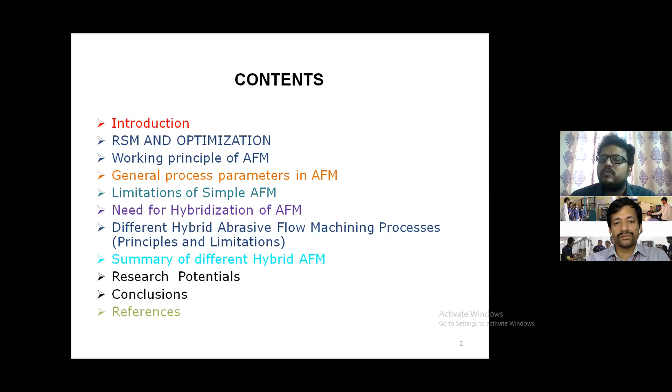So in an overview of today's morning and afternoon presentations, I would like to give details about my complete research on DOE, design of experiments. Mainly I concentrate on RSM, Jaya algorithm and fuzzy logic, etc. How these help, how we are improving our methods, developing a new product and improving the existing performance of the machine using these techniques. So let us start.

Introduction to RSM. Response surface methodology is a collection of statistical and mathematical techniques useful for developing, improving and optimizing processes. It is used in the design, development and formulation of new products as well as in the improvement of existing product designs.

So in my case, when I was doing my masters, I had one challenge to develop a new product, and that product is used for machining purposes. The product name is abrasive media, abrasive flexible media, which is used to finish intricate geometries, right? So that is a new product development.

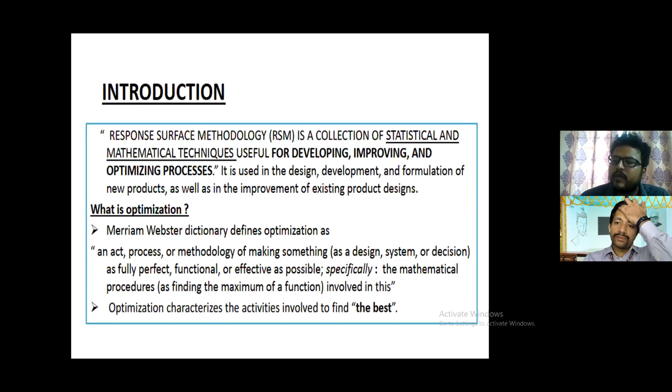So I have done literature on existing products, commercially available products, and after finding all the results, I applied RSM, response surface methodology, in order to give the best result. Based on RSM, we have also conducted optimization in order to find out the best among the existing products. I'm just telling an example. Yeah. So what is optimization?

Optimization can be defined as an act, process, or methodology of making something as fully perfect, functional, or effective as possible, specifically the mathematical procedures involved in this. Optimization characterizes the activities involved to find the best. So, whatever your problem may be, to develop a product or to prepare or to function any machine with some novel thoughts, in order to find out the best, you take a simple example.

If you want to prepare a tea or coffee in your house, right? So we have input variables, we have dependent variables and independent variables, such as your output should be the taste of the coffee, right? And what are your input variables? The amount of sugar you add, the amount of milk you add, right? And the amount of coffee powder you add, right?

You can add the quantity of milk and the quantity of sugar and the quantity of coffee powder. The combination of these three input variables will give rise to the best output, right? So how much quantity you have to add, what is the temperature you have to maintain, and what is the percentage contribution of your milk, coffee powder, and sugar. So the combination of these parameters will give rise to an output called the taste of the coffee, right?

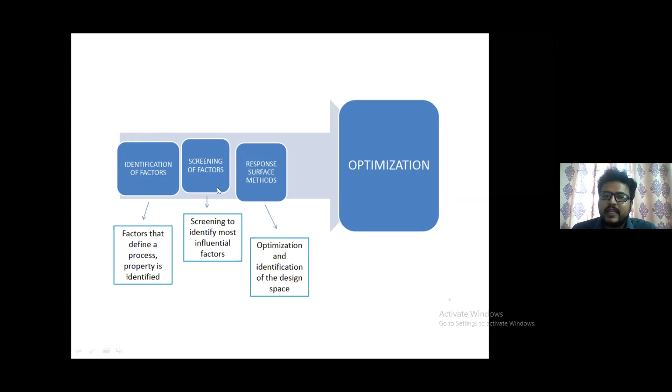Next, screening of factors, right? So if already there are factors, you can directly apply the RSM and you can get the objective function, right? So if there are factors, then you need to screen them to identify the most influencing factors, right? So in any experiment, some people may be working on EDM, some on ECDM, AFM, or any process. First, you need to identify the factors. What are the important factors and their levels, right?

Maybe based on literature, or maybe based on doing some pilot experimentations, you will get some idea, or maybe based on the environmental conditions and the practical problems which you face during experimentation, you will get certain ideas. Based on that input, you need to screen them. So which are important and which are not important. Not important means which are influential parameters, factors, and which are not influencing factors.

And next is optimization and identification of a design space. Using response surface methods, you can optimize and identify the design space for these input variables and the output variables. So this is just to brief what optimization is, and when we are discussing my process, I will explain to you in detail how to identify and screen the parameters, right?

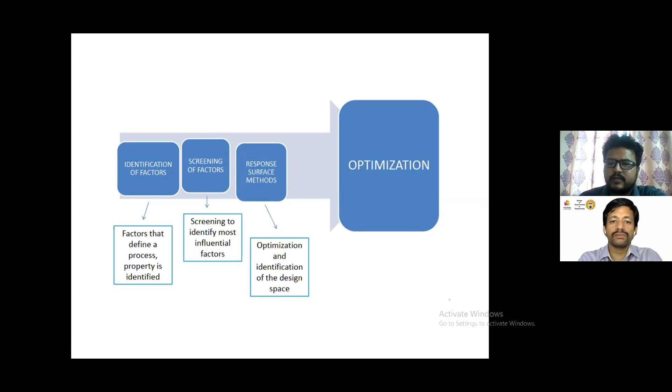So this is just to know when this response surface methodology started, how they quoted it in various papers, and what they majorly worked on. They worked on some chemical and related fields, right? So in 1976, another paper, a review on response surface methodology from a biometric viewpoint, was published by Mead and Pike.

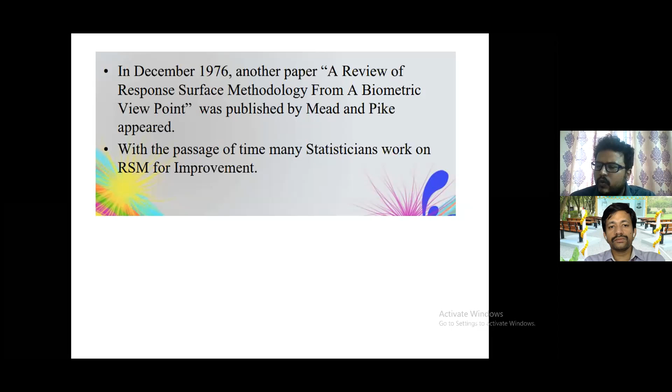Right, in the passage of time, many statisticians worked on RSM for improvement. So nowadays we see various experimental works in various fields like the medical field, automobile field, manufacturing field, pharma, everywhere. They apply this response surface methodology or the design of experiments, and they do all this statistical work in order to give us the better, right? So a lot of work has been done nowadays using RSM. Yeah.

What actually is RSM generally, and what are the main objectives? RSM uses various statistical, graphical, and mathematical techniques to develop, improve, or optimize a process. It is also used for modeling and analysis of problems in which our response variable is influenced by several independent variables. What are the main objectives? Why we prefer RSM is to optimize, to develop, and to improve wherever necessary, right?

So in some cases, optimization is very critical, right? Why? Because if you want to give the best with less resources, you need to optimize it. So in order to do optimization, we should have some techniques. So RSM will play an important role in order to optimize, in order to develop a product, or in order to improve the existing one.

Yeah. RSM is used in different fields of real life like industries, agriculture, electronics, the medical field, and many other fields. Just for an example, in the medical field, a single tablet is introduced in the market after a large number of experiments. You can see the application of the design of experiments here. Suppose a company wants to introduce a new painkiller tablet in the market; the pharmacist will make the tablet that will be more effective, has rapid action to kill the pain, and will have a low market price for the patient, right?

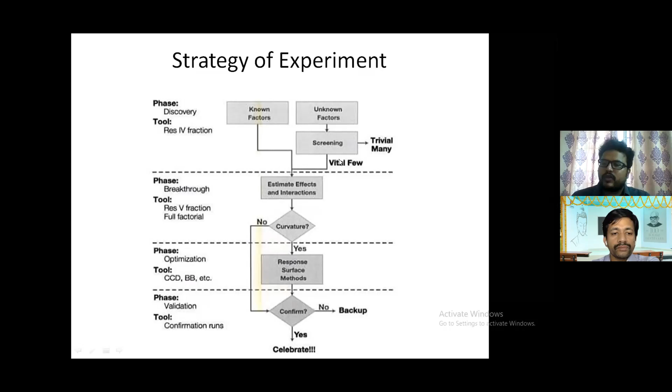So what are the known factors in that process and the unknown factors? If the factors are known, then you can estimate effects and interactions. If the factors are unknown, then you need to screen them, experiment on them, and then estimate the effects and interactions. If you observe any curvature, then you have to go for response surface methods in order to optimize, using tools such as CCD and BB, the central composite method and Box-Behnken method, which are part of response surface methods.

When there is no curvature, meaning no maximum point or minimum point, then directly you can confirm it, and if no, just go for backup, or if yes, just celebrate. So that is your strategy.

When you are doing any experiment, take a simple experiment, machining of any material using a lathe machine. You have to know the factors. What are the influencing factors in the lathe machine? For example, depth of cut, cutting speed, and feed. And there may be some unknown factors as well, like the temperature raised during machining. You may screen it, using the proper instrument to measure the temperature raised due to the friction of the cutting tool and the workpiece, right?

If the factors are known, for example if you know the factors and the ranges of the factors like speed (cutting speed, high or low), feed (high or low), or depth of cut (high or low), and what is the combination—for example high cutting speed, low feed, and low depth of cut—you will get a certain output. If you vary them, you'll get a certain output, and there is a chance of getting a curvature.

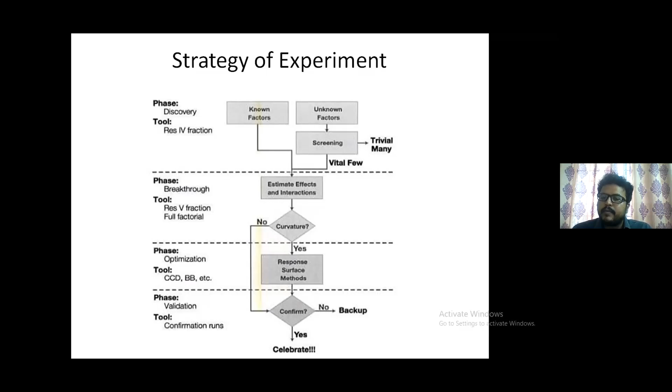There are many other factors that come up when you perform the experiment, like environmental conditions—the tool may get blunt, there may be breakage in the tool, there may be vibrations in the workpiece. So all these environmental factors also need to be taken into consideration while doing the experimentation.

So finally, if you make a table and apply the principles of RSM and other optimization techniques, that prediction data should be useful to others working on the same material or same tool. That will save a lot of time and money, and reduce your manufacturing cost.

So in any process you take, you have a better strategy of experiment. That strategy is important. Let us see RSM.

RSM revolves around the assumption that the response is a function of a set of independent design variables—x1, x2, x3, and so on up to xk. The function can be approximated in some region by a polynomial model, which you can see in the slide.

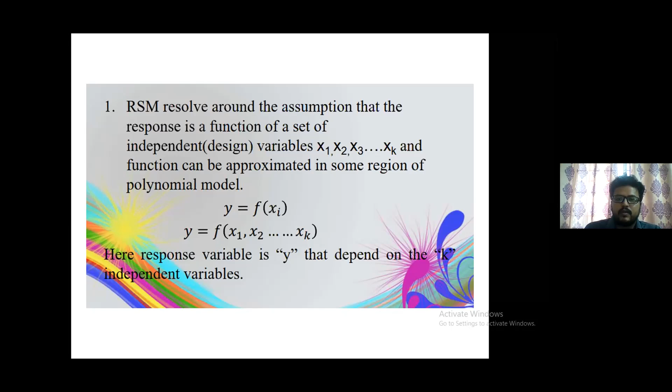Here the response variable is y, which depends upon k. So x1, x2 are the independent variables, and the combination of these k values will be independent, while y will be the dependent variable, which is the function or objective function of this study.

If the factors are given, then directly estimate the effects and interaction of the model as described in the figure. So if the factors are known, based on your experimental field—whether forming, welding, or machining—directly estimate the effect and interaction of the model. If the factors are unknown, then first calculate them using a screening method.

We can use the screening method here: estimate the interaction effect using the first order model. If curvature is found, then use the RSM model, and the second order model will be used to approximate the response variable. So this is the second order model, and this is the first order model.

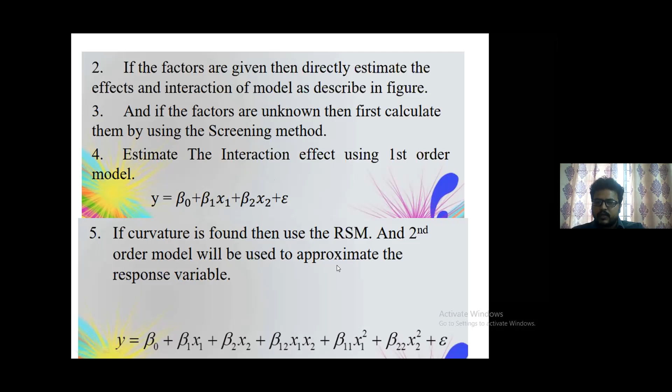So if the factors are known and there is no curvature, then you can use this first order model, and if the factors are known and there is a curvature, then use the second order model, which is related to RSM.

So what are we discussing about independent variables and dependent variables? Independent variables are input variables—those factors which are under the control of the experimenter. These factors are varied within accepted limits to identify the response it makes on the dependent variable. The experimenter has control on it and will vary it accordingly in order to have a better output.

He can vary that based on his experimental conditions, and he will have control over the variation of this independent variable. Whereas the dependent variables are those factors which are studied in an experiment—factors described to define this independent variable.

So there are several factors to define this independent variable. In any study, there will be some independent variables, dependent variables, and constant variables. Constant variables are kept constant so that varying them has no effect. If you do some set of experiments, you will find some constant parameters, some dependent variables like responses, and independent variables whose combination gives better results. By doing literature review and pilot study, one can identify the independent variables, dependent variables, and constant variables used in the function.

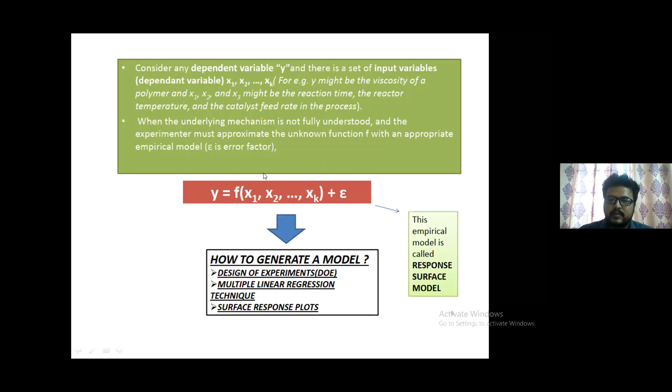Here the plus sign indicates the increase in y, and the minus sign indicates the decrease in y. Beta naught is the constant, beta 1, 2 up to 12 are the regression coefficients, y is the dependent variable, and x1, x2 are the independent variables in the given equation. It can be either a first order or second order polynomial equation. These trend curves, and also the surface plots plotted in RSM, will have certain meaning.

So there are types of plots. Whether you choose manufacturing techniques, pharmaceutical, automobile industries, or electrical simulation, there are some types of surface plots and response plots you generally observe when studying any paper or research work on RSM.

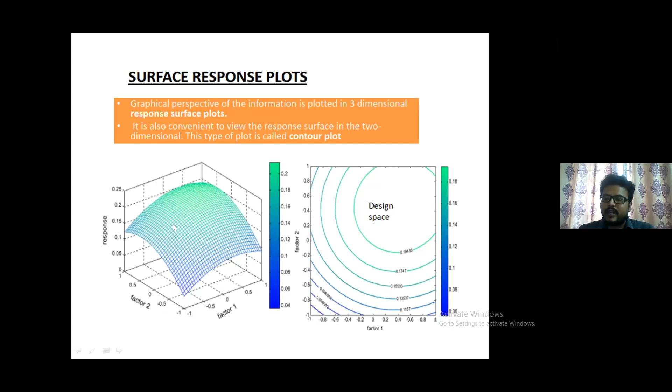This graphical perspective of information is plotted as a three-dimensional response plot, which we call an interactive plot. This is considering factor 1 and factor 2, and this is the response, showing how the interaction of factor 1 and factor 2 affects the response. This can also be plotted in two dimensions, which we call a contour plot. You can see in this figure the contour plot and the three-dimensional plot generally used in RSM.

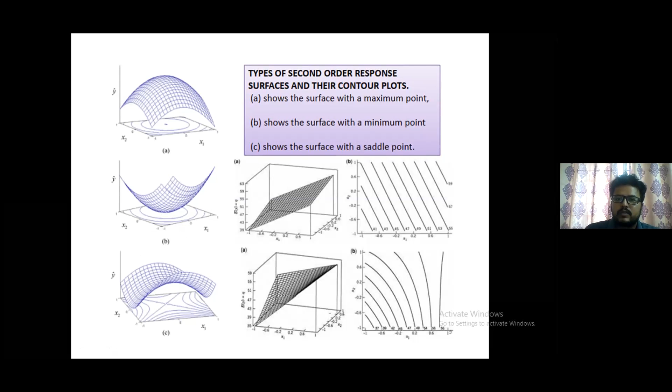So RSM can be conducted in a sequential manner. When you start working on RSM, you don't exactly know what the optimum solution is. You just start with the current operating conditions. When you start working on any machine, like a lathe machine, milling machine, or abrasive flow machining, you don't exactly know the optimum values. In order to get those optimum values, you need to reach them in a sequential manner.

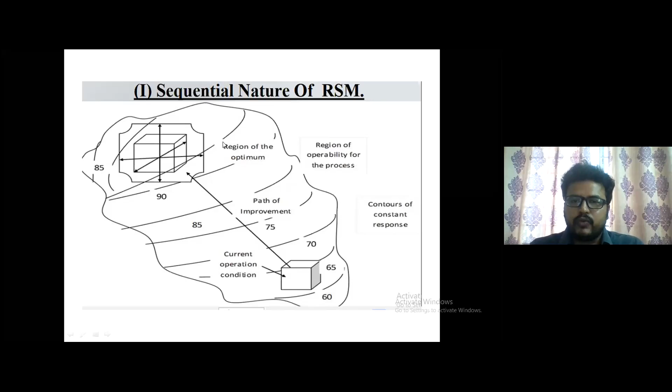So you reach the optimum and the results converge, giving the best output with the least resources available. You need to reach this using RSM in a sequential manner. RSM is a sequential procedure. Often we are at a point on the response surface that is remote from the optimum, and we want to move rapidly from the current point to the optimum point in sequence. If we want the optimum point where the resources are minimum but output is maximum, that is called our optimum point, and we move rapidly towards it. This is the advantage of RSM.

After conducting experiments, we have a lot of software to perform the RSM procedure, like Minitab, Design-Expert software, and you can also perform it in an Excel sheet. But how do you validate them? Validation is one of the important parts. If you validate them, only then can you share your data or publish your data related to RSM or optimization.

We will discuss in the case study how optimization can be done and how the results will be validated using various theoretical analysis, simulation, and by comparing the data with other optimization techniques.

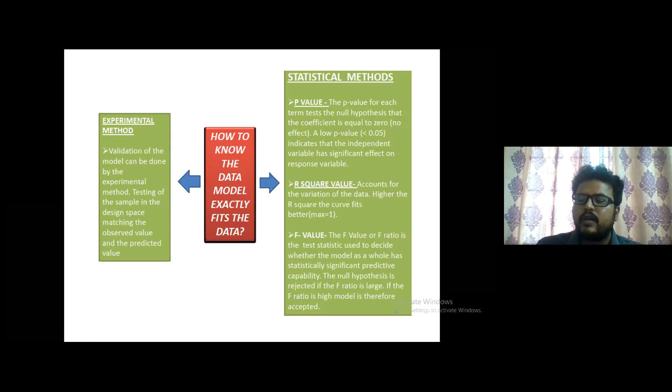These are the few key points you need to remember when working on RSM. You have to go through the p value, R square value, and F value. If there is any problem, you have to screen your factors again and repeat the experiments to get a perfect fit. If you want to validate your model, you need to check these few important factors after conducting the experiments.

So why design experiments? Without that, we could also go, right? Why then? In order to obtain the maximum information, like you can see trend plots, three-dimensional plots, and trend curves, and with fewer experiments the effect of parameters is identified, with more information generated. You can have a lot of data and details when you conduct design of experiment. The aim is to obtain maximum information from minimum number of experiments, to screen factors when a large number of factors are present.

In some cases there will be a large number of factors in some experiments, for some studies, etc. How to screen them? You can screen them and minimize the factors using design of experiments and RSM techniques, and get a curve that exactly fits the actual model. So we are trying to get a curvature that exactly fits the actual model. The experiment has to be designed in such a way that the obtained data exactly simulates the original model.

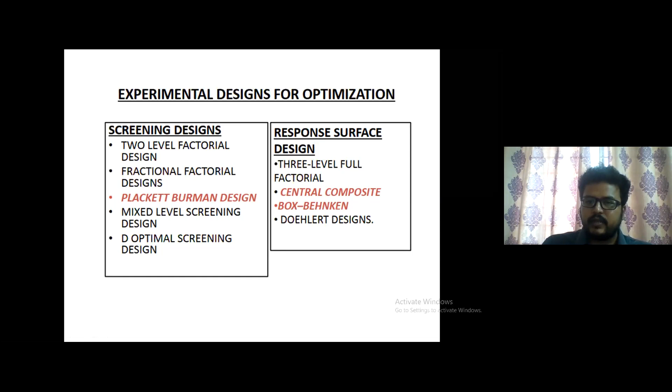After doing the proper design for your experimentation, you can also analyze the points estimated by DOE. What are the points estimated by DOE? You can compare them with the experimental points you actually got from your experimental data, and perform some prediction out of it.

Coming to the central composite method, I also used this central composite method. So what is its application and how does it work? The Box-Wilson central composite method, commonly called central composite design, is an important experimental design which gives a response curve that suits a second order polynomial quadratic empirical model. A second order model can be constructed using central composite design, and it's a combination of 2 to the power of n factorial designs plus center and axial points.

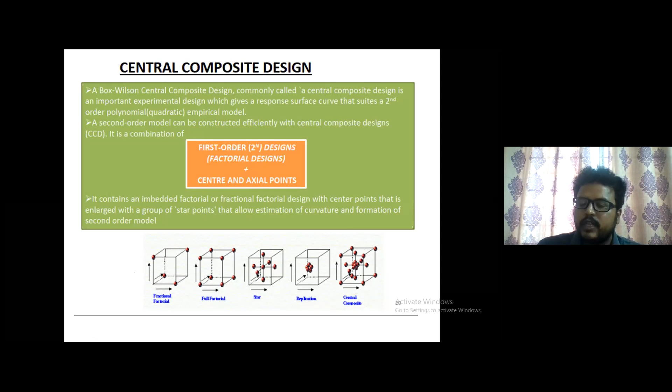As for the major applications of RSM nowadays, the most frequent are in the industrial area. RSM is important in designing, formulating, developing and analyzing new scientific studies and products. It is also efficient in improving existing studies and products. The most common applications of RSM are in industrial, biological and clinical sciences, social sciences, food sciences, and physical and engineering sciences. We are concentrating mostly on engineering sciences, where RSM is helpful and useful.

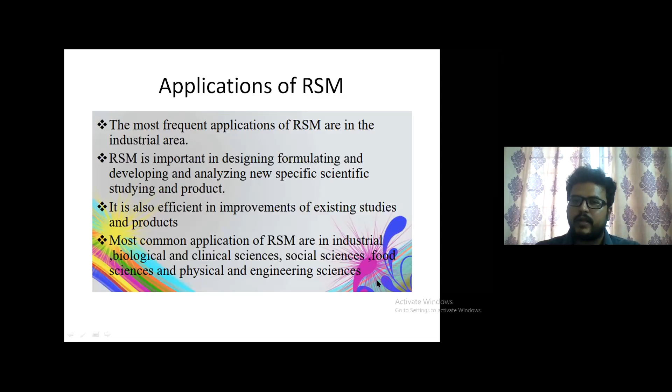Coming to background: in the morning session, I will explain the background of my process, the parameters, factors, principle, and the hybrid variants. In the afternoon session, I will show my results, how I applied RSM, how I validated my experiments using RSM, how I compared RSM with a fuzzy approach, and finally how I performed optimization using RSM. All those case studies, experimental results, and simulation results we'll discuss in the afternoon.

But in order to understand them, you should have background on my process, which is abrasive flow machining. So we'll discuss the background of abrasive flow machining in this session.

So before closing the morning session, we'll discuss the process, right? Abrasive flow machining is one of the non-traditional finishing processes, which is used to finish or upgrade targeted surfaces which are complex in shape. The advantage of this process is you can machine intricate or complex geometries such as turbine blades, or a nozzle which we use for gas welding, etc.

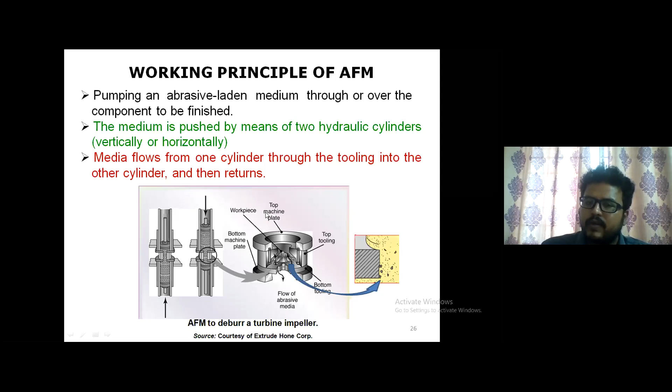So this is my machine. By understanding the machine, you should understand what are the main parts of the machine and the main factors influencing the machine. AFM media, I talk about medium, right? So medium is a combination of viscoelastic polymer with special rheological properties plus fine abrasive particles.

It means in AFM process, in abrasive flow machining process, we use a rheological flexible gel which has the rheological properties, and this gel is mixed with the abrasive particles, so that these abrasive particles are successfully carried with the help of this gel and reach the target surface for finishing. So let us see this video.

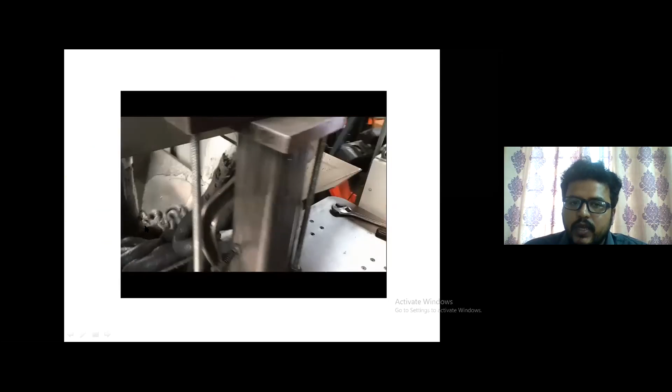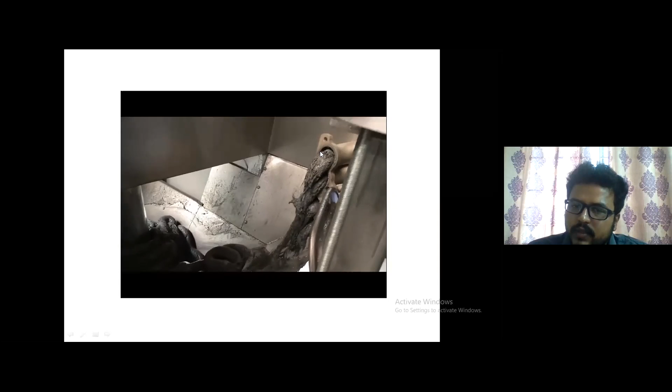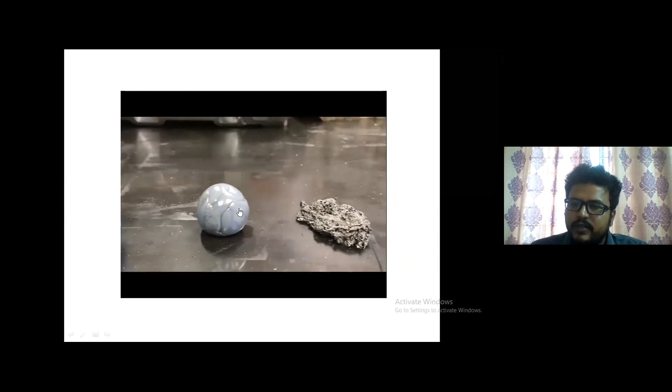Here you will understand how the medium or the tool is flexible in this process. In this video, they are trying to finish the manifolds which are used in the car. You can see this is the flexible medium coming out from this cylinder tube. Yeah, this is the medium I'm talking about. So it is flexible in nature. This is before machining and after machining, you can see.

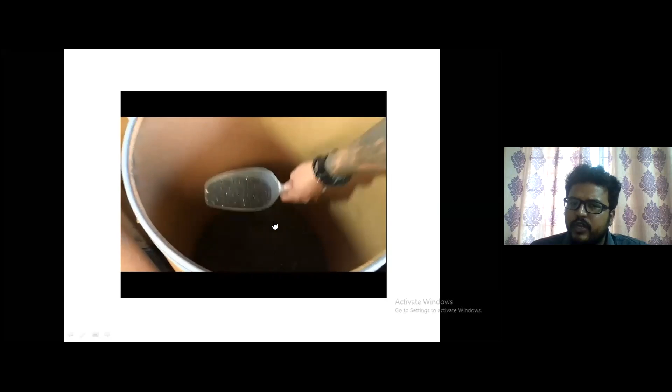So due to this flexibility and with special rheological properties, and these are the abrasives which are mixed. We all know the abrasives generally used are silicon carbide and aluminum oxide. By varying the size of the abrasive, you can have control on the process, in finishing as well as in the material removal, right?

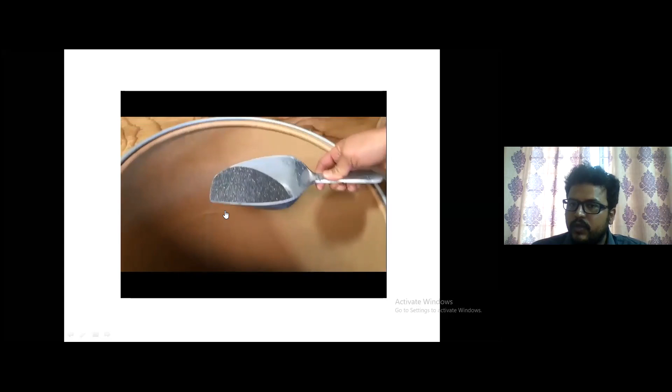So the general phenomenon is if you use lower mesh size, means small grit size of the abrasives, then the finishing will be better, whereas MRR will be marginal. If you use large grit size, your MRR will be better. Here you can see the medium will be extruded. So this is called one-way AFM.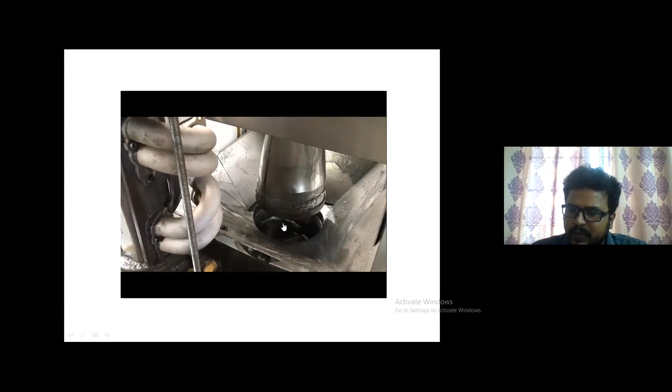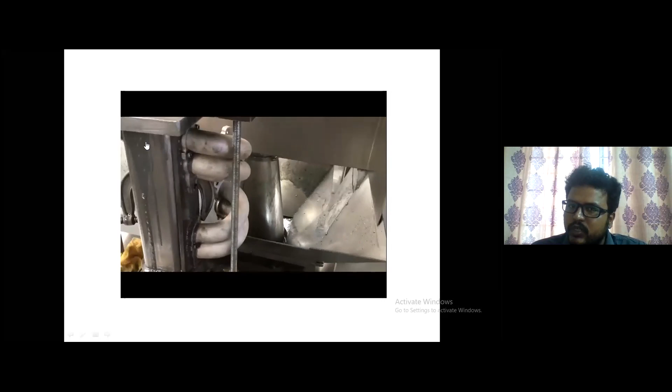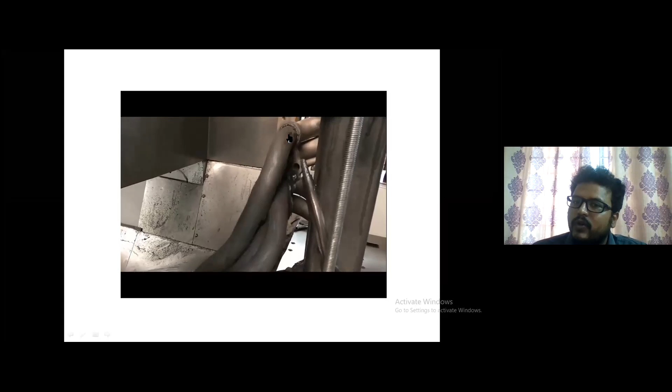Here this cylinder is filled with medium, and that will be extruded towards the target surface. Here our target is to finish the internal geometries of this manifold. So if there are any small burrs present you want to remove, or if you want to radius them, or if you want to finish it at nano level, then we extrude this abrasive medium towards the target surface. So this is my method.

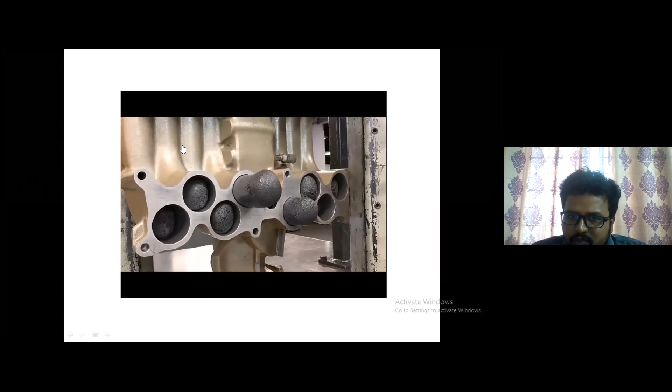During my masters, actually we developed a new material to finish and to extrude. You can see here the finishing of this manifold using this flexible medium. I hope you understand the advantage of this process. You cannot grind it or you cannot hone it, right? If you hone it, you cannot reach this place.

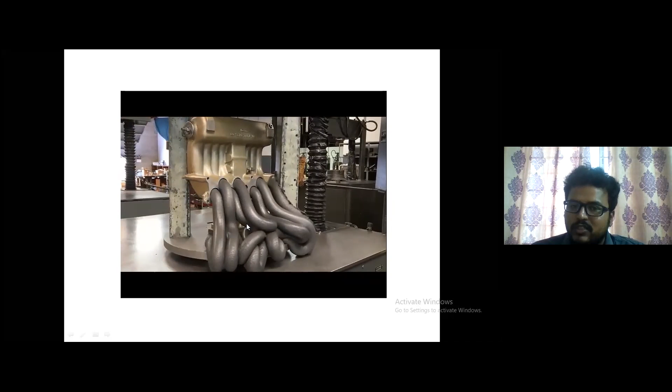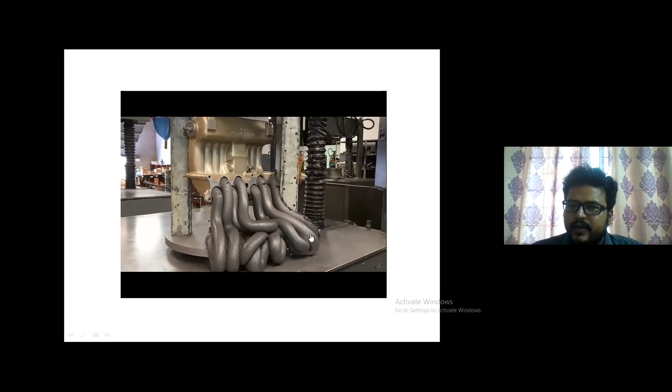So if you want to reach all these complex geometries, then this is one of the important processes where the tool is flexible in nature, and you can extrude it using an extrude hone machine in order to reach the target surface. You can see the finished part with a better surface finish compared to the actual part. After casting, the surface roughness will be very high actually.

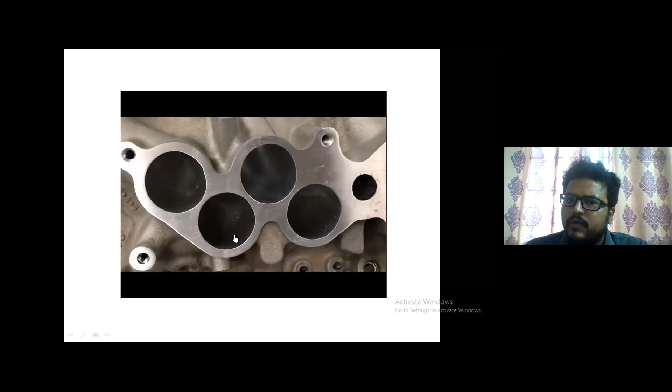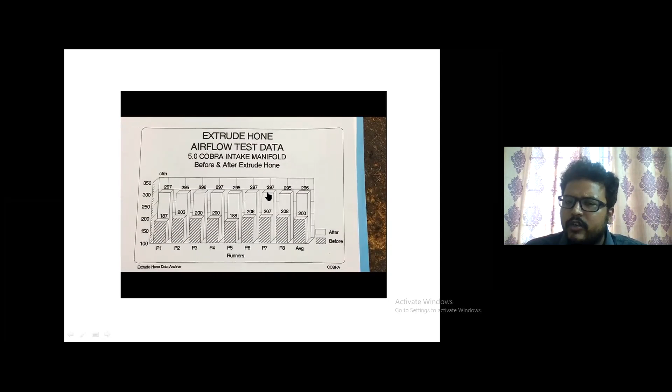So the surface finish plays an important role in automobile parts. If the finishing is better, then the performance will be better and the functionality of the parts will be better. And also the fatigue life of the part is very important, when the parts are continuously undergoing fatigue loading. And mainly the medical implants, which are generally made using titanium alloys, which can be rejected in our bodies, so finishing is very, very important.

So nowadays there are some advanced methods to make these medical implants, etc., by using 3D printing technology. However, the finishing is important. So if you want to have a better finishing, then you have to go for advanced processes like abrasive flow machining. I hope after seeing this video, you understand the importance of this process and how this process is different from the other processes, right?

In other processes the tool is fixed, and the tool will not be flexible, right? Whereas in this process the tool is flexible in nature and it can abrade the target surface. And another important point here is how this flexible tool is made, how it is maintained, how it is controlled, and what are the parameters of it. That is an interesting part here.

Let us see another important part, that is tooling. This tooling is critical here. Why? Because it should hold the workpiece and it should guide the flexible tool or the medium in a proper direction. Otherwise you cannot finish the target surface, right? So you should have proper guidance. That proper guidance will be given by the design of the tooling. That's why the tooling is also very important.

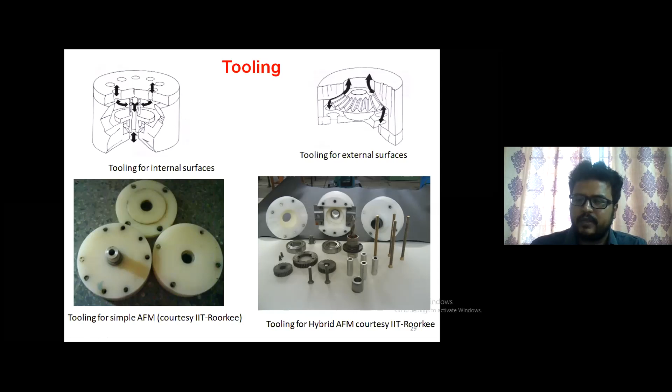So we have to advance this tooling by using various mechanical devices, in order to have better functioning of this tooling, better holding of the workpiece and guiding of the medium. As I already discussed, the various applications of abrasive flow machining are in medical implants, turbine engine parts, automotive parts, die polishing applications, etc.

So what are the process parameters in AFM? This is one of the interesting points here. When we are talking about design of experiments, optimization, etc., first you need to identify the parameters in your process, either it may be AFM or EDM or ECM or ECDM, laser machining, or any process. Identify the process parameters first, right? Then only you will understand where the response and the interaction lie.

As we discussed our process, the main part is the machine settings. Extrusion pressure, so how much pressure you are applying to your tool; number of cycles, so how many cycles you require in order to get the better response. In my case, my response is better surface finish. And flow volume and its speed: we are working on a semi-solid medium, so we need to also have control on the flow volume and its speed, right?

Coming to abrasive medium formulation: as I said, it's a combination of viscoelastic polymer mixed with abrasive particles. So what are the independent factors that will influence the medium? In machine settings, you should have control on pressure, number of cycles, flow volume, and speed. Similarly, in the abrasive medium you should have control on the medium viscosity. You are working on semi-solids, so the viscosity should be properly maintained. If the viscosity increases or decreases, then there is a chance of variation in the media behavior.

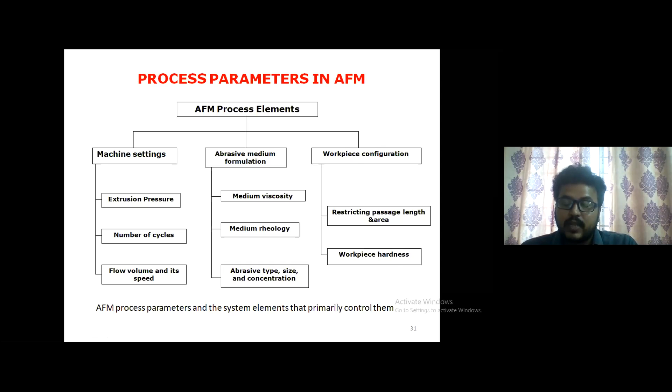The third important factor here is the workpiece configuration: restricting passage length and area, and workpiece hardness. The hardness of the workpiece you are using plays an important role. And the restricting passage: when you are developing tooling, how much you restrict the passage can improve the surface finish. So this is about the process.

Now, discussing the advantages and limitations of the existing process, you can see a few things. AFM can finish inaccessible areas, like turbine blades, and the engine part of an automobile was also finished in the video you observed. Complex internal passages or components can be finished. It can save 80% of the cost of final finishing of a component compared to manual finishing, and it is easy to operate.

You can see the principle is very simple. You are just pumping the medium from one cylinder to another cylinder, passing through the targeted surface. The component can finish with high tolerance. So this is one of the capabilities of AFM. You can finish at high tolerance, but the finishing rate will also be little slow.

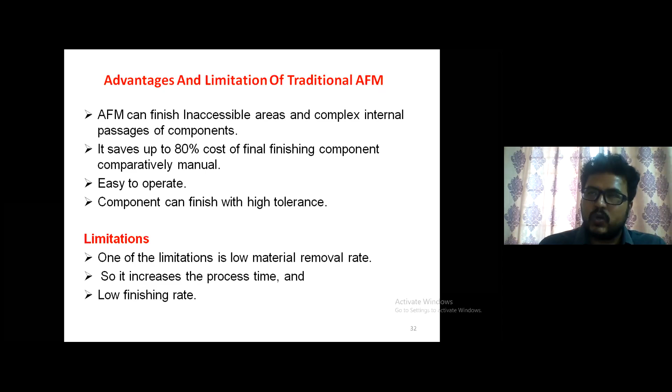That will become a limitation that we'll discuss. Being such a good process, there are also some limitations. One major limitation is low material removal rate, meaning low finishing rate. It requires a lot of cycles and a lot of time in order to finish. This increases the processing time. So, being such a good process, there are some limitations such as low material removal rate and low finishing rate. Now what is the need for hybrid AFM process?

Once you understand the process and its behavior, you will also look into the applications of the process as well as its limitations. Now one has to study how to overcome these limitations. Various researchers have hybridized the process by adding two or more non-conventional processes in order to improve the finishing rate, in order to minimize the time required for machining.

Why do we do hybridization? For finishing a surface of advanced materials, finishing up to nano level, improving the efficiency of the process, and to achieve higher material removal rate, we generally do hybridization.

Why I'm discussing this is because in the case studies, we worked on hybrid AFM only. Simple AFM is used to compare, whereas the hybrid AFM results were much better than the simple AFM in terms of responses.

So we applied RSM for both simple AFM and hybrid AFM, and we compared the results. What I would like to tell based on my research is how the product is developed and how the process is improved by using these tools, how you are validating your data, and how you are exploring and improving your results by getting optimality, and by giving the prediction to the society. By doing all this validation modeling, that will be ready for use by industries, and also these papers will help new scholars working in that particular area. These prediction models, developed using RSM and other optimization techniques, will be ready for use.

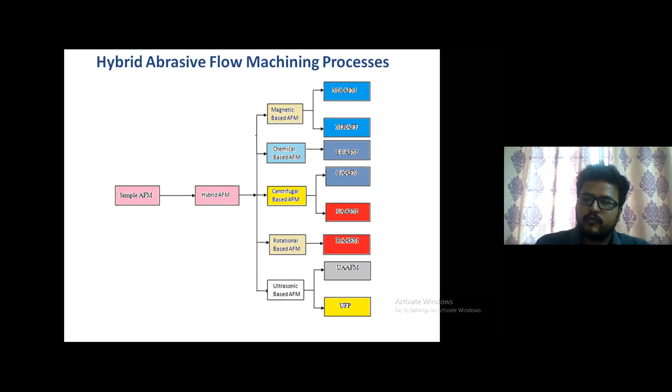Let us see. In 1998, Jones and Hull first introduced ultrasonic vibration to the medium. We all know the abrasive medium is here, and they introduced this ultrasonic actuator or ultrasonic booster, and vibrated the medium. By vibrating the medium, here you can see the medium is vibrated and also extruded, and this medium comes out from here passing through the target surface.

The addition to the existing process here is that ultrasonic vibrations are given to the medium. A vibrating tool is introduced that energizes the mixture, vibrating the abrasive particles to energize the media. This process achieves a better surface finish than the existing process, though there are disadvantages too, like lack of control on process stability, and it is used only for blind holes, not for micro holes or open holes.

The next technique is magnetic assisted abrasive flow machining, developed by Sehijpal Singh from IIT Roorkee. The basic principle is the same: the machine consists of two hydraulic cylinders and a medium cylinder, with tooling, and the job is to pump the medium from one cylinder to another, passing through the target surface.

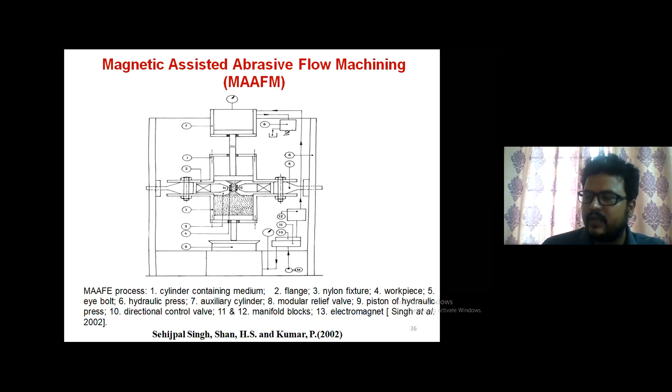By applying the magnetic field, he observed the behavior of the medium and the responses. The new parameter introduced in this field is magnetic flux density - what magnetic flux density is applied. That is a new parameter here.

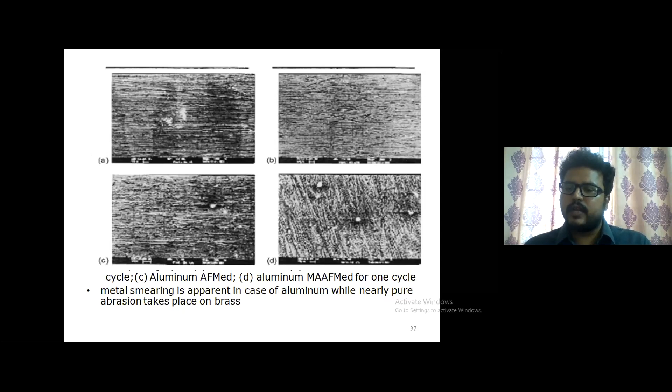Results were recorded while machining both magnetic and non-magnetic materials. Here aluminum is finished, and they found better improvement of finishing in magnetic material because of the magnetic flux lines present, and due to more attraction of the abrasive particles and carbonyl iron particles toward the surface.

Next is magnetorheological abrasive flow finishing, introduced by Jha and Jain in the year 2004. We know the principle of AFM, and we discussed the magnetic field applied. These scholars made further improvements and studied the magnetorheology in the process.

What they did was introduce carbonyl iron particles mixed with abrasives. As seen in the video, there is a semi-solid medium mixed with abrasive particles as well as carbonyl iron particles, and they applied the electromagnetic field and studied the rheology.

One interesting study shows the abrasive particle surrounded by many carbonyl iron particles. They analyzed that the abrasive particle forms a chain - the carbonyl iron particles form a chain around the abrasive particle - and the tendency of the abrasive particle hitting the target surface increases, as well as the axial velocity.

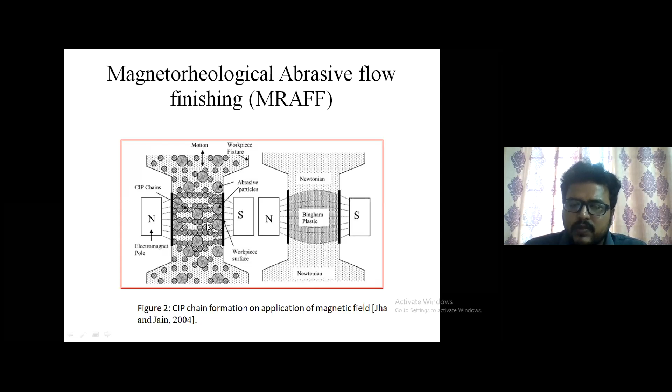The axial velocity, the force of the abrasive particle in the axial direction, has increased. This tends to give better finish in lesser time, because without chain formation, the abrasive particle may be loosely held and the hitting force may be less. In this process, the iron particles surround and energize the particle, giving better resultant force compared to simple AFM.

Here you can see the CIP chain formation around the abrasive particle, and this is an asperity. The abrasive particle hits at an angle, in the flow direction. As flow increases, the chain formation helps the abrasive particle energize stage-wise, assisting the shearing of the peaks. Our final job is to shear the peaks and finish the workpiece with nano-level finishing.

So this carbonyl iron particle chain helped the abrasive perform better compared to simple AFM.

In the next study, another scholar rotated the tooling. We all know what tooling is - he rotated it instead of fixing it. So what happens if you rotate it?

He used the spindle and rotated it at different RPMs. So what happens is, if you rotate the abrasive medium or tooling, there is some flushing action, and also the inactive particles become active after rotating the medium inside the tooling. So this is also one of the hybrid variants, and they tried to improve the process.

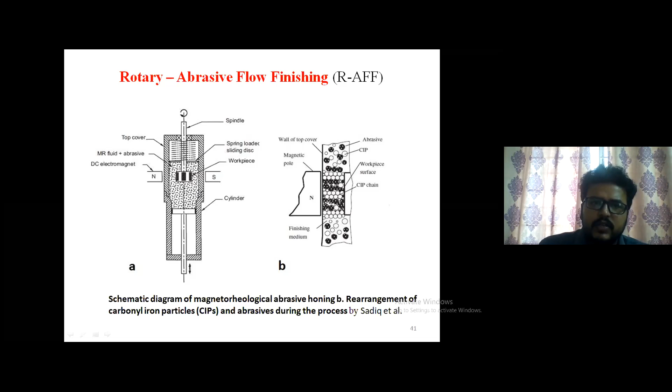They improved the process by introducing a new parameter called rotation speed in AFM. By varying this rotation speed in RPM, they recorded various results on finishing parameters and finishing effect at various parameter levels. Every hybrid variant will have certain hybrid parameters introduced, and you need to completely analyze and quantify these parameters. For that, we need the help of DOE, RSM, and other optimization techniques. So here the new parameter introduced is the rotary speed and how it varies.

Next, another scholar tried introducing a centrifugal force in abrasive flow machining. I'll explain how we achieve the centrifugal force in the tooling. Basically, the AFM principle is simple here.

Apart from AFM, he introduced a centrifugal rod in a cylindrical bush, which is the workpiece. In this cylindrical bush, he introduced this centrifugal rod and rotated it, and due to that, centrifugal force was generated in the tooling area. Due to the centrifugal force generated around the tooling and workpiece zone, the abrasive grains became active, and there was more participation of abrasives hitting the asperities. Due to this introduction of centrifugal force, he achieved better material removal rate than the simple traditional AFM process.

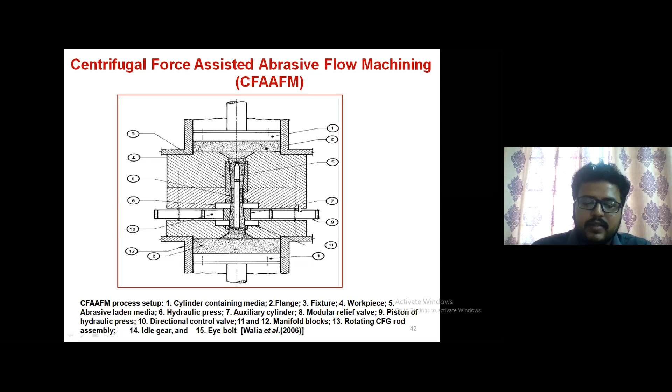Here, the new parameters introduced are the rotation of this centrifugal rod, the speed they used, and the shape of the rod. The shape of the rod also influences the parameter - if you change the shape, the restricted passage will have a certain effect. And if you rotate at high speed or low speed, there is an effect on the process response.

So here you can see they used a nylon fixture, and with the help of a simple gear train, they introduced this centrifugal rod inside the workpiece, rotating it with the help of a DC motor. They varied the rotation and also changed the shape of the rod, and recorded results out of it.

In order to do this, every hybrid variant paper you find on the internet - centrifugal force, magnetic assisted, magneto-rheological, simple AFM - will show how they applied RSM and design of experiment for improving the process. In this case, you can find papers showing how changing the shape of the rod affects the process response, and how varying the speed of this centrifugal rod varies the process response.

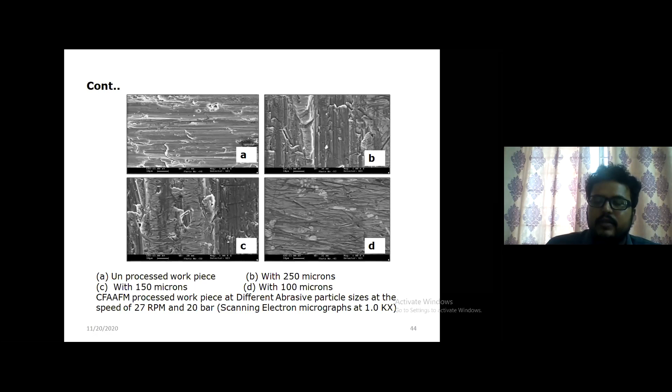So with different levels, with different factors, and with less number of experiments, you can have the better output and better result. So among them again you can find the optimum values, and you can also validate the data with the help of other optimization techniques, right? So these are few results which are presented.

And another scholar. So this is another hybrid variant. This name is drill bit guided abrasive flow machining. So in this drill bit guided abrasive flow machining, like in the previous case, we have seen that the centrifugal rod is introduced and they rotated the rod. Right, here, instead of centrifugal rod, they used a simple conventional drill bit, and they have not rotated this drill bit. They have just introduced the drill bit in the cylindrical bush, and they applied the AFM principle, right?

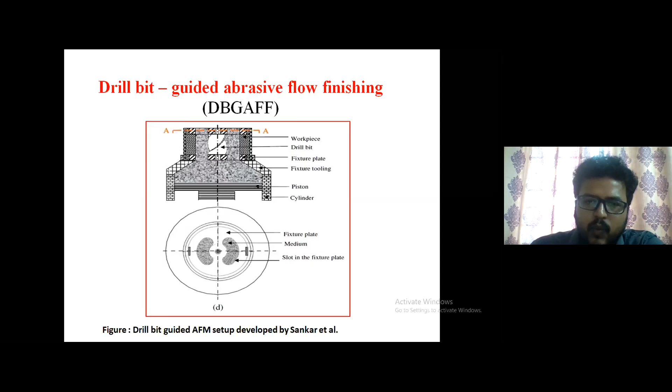What they observed is, due to the helical flute structure of the drill bit, here you can see the flow along the flute path has a lot of influence, right? And there is a reciprocating axial flow and scooping flow. This is done only because of the shape of the helical flute drill bit, right? So this is a schematic analysis, and based on this, they have done some experiments, and they recorded that the surface finish is better, and material removal is also better compared to the simple AFM process, right?

So here the new parameter is introduction of the drill bit. Maybe here drill bit is not a variable, we are not rotating it, but the shape and the restricting passage will be a variable here, right? So means the size of the cylinder you are using in order to restrict the passage, means the workpiece configuration will be one of the input variables you need to consider while doing the experiment, right? So by varying it, how the process response will affect. By varying the size of the drill bit, how the process response will affect. By rotating it, someone tried, how it will affect, etc.

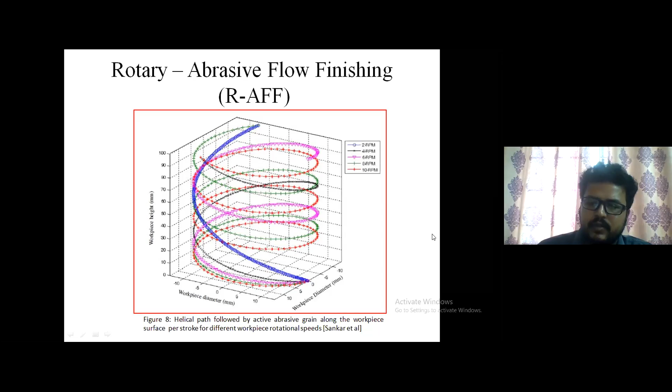So if you are not rotating, the abrasive particles mixed with medium will slightly move from one direction to another direction, and there are more inactive abrasive particles. Inactive abrasives means which are not interacting with the asperities, which are just sliding and moving forward, right? Whereas since you are rotating the machine, the abrasives are also rotated, the medium is also rotated inside, and there are more protrusions, more interaction compared to simple AFM, and they recorded better result. So this is done again in IIT Kanpur by Sankar et al. Here you can see.

So another scholar, Rajesha et al., in the area of abrasive flow machining, has introduced the drill bit. We already have seen the introduction of drill bit gives you some helical flow and scooping flow, and due to its helical behavior, the process response will vary, etc. Right? But what he has done is he has rotated the drill bit as well. Means he is generating the centrifugal force and also is taking the advantage of the drill bit. Right?

So the principle is simple here. The simple AFM principle is there. It consists of two hydraulic cylinders and the medium is present, and we are pressurizing the medium from one cylinder to another cylinder, whereas the drill bit is introduced in the workpiece zone, and the drill bit is rotated as well. So what are the factors here? The new factors are the rotation speed of the drill bit, as well as the size of the drill bit, etc.

Right. So what he recorded is, by rotating the drill bit at higher speed, it will act as a normal rod. Means there is no effect of this scooping and helical flow behavior. At lower speeds, it has a better effect, because the helical flute structure of the drill bit will function. Whereas if you rotate at high speed, then it acts as a normal rod and there is not much effect, only the centrifugal force may act, right?

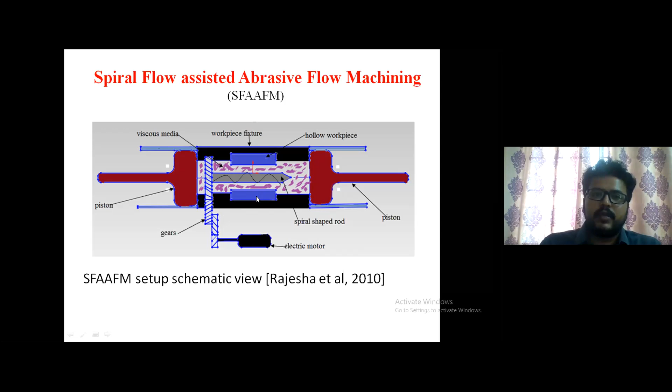So he recorded by using RSM. He has developed a table by using the design of experiment. You can see in the paper how the rotational speed of the centrifugal rod, the helical flute structure and the centrifugal force influence this parameter, and how we are doing the interaction plots and how we are presenting. So that is what is important in using DOE and RSM, etc.

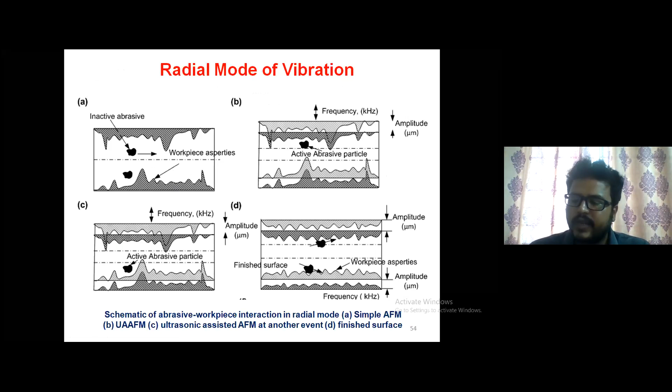So by changing the mode, see for example, here one interesting study. So here in the first case, the actuator is fixed, means the vibration of the workpiece is perpendicular to the flow direction, means the actuator is fixed radially here, and we studied, we recorded the result, right? Similarly, we observed, when you fix the actuator axially, what happens to your response? So you can see in the figure.

So this is the media flow direction, right? It's in horizontal AFM, and we are fixing the actuator radially, perpendicular to the media flow direction. Whereas if you change the actuator position and if you vibrate the workpiece in axial direction, then there is a change of the process response, right?

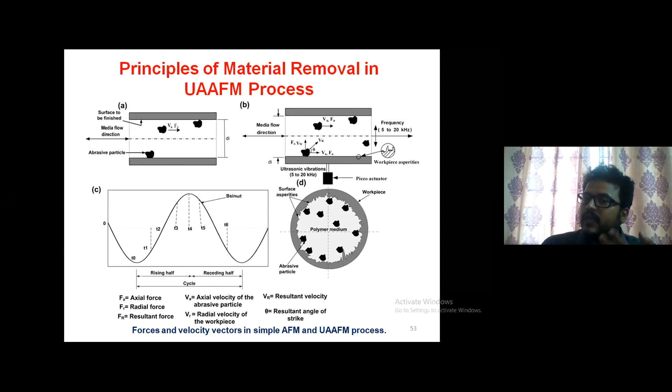So what are the new parameters added here again in my process? Ultrasonic frequency, amplitude, and also the frequency in radial direction, and the actuator setup in radial direction and the actuator setup in axial direction. See, we are getting a lot of addition of the factors, right? So if you don't have a proper design of experiment, then it is very difficult to quantify and analyze your data.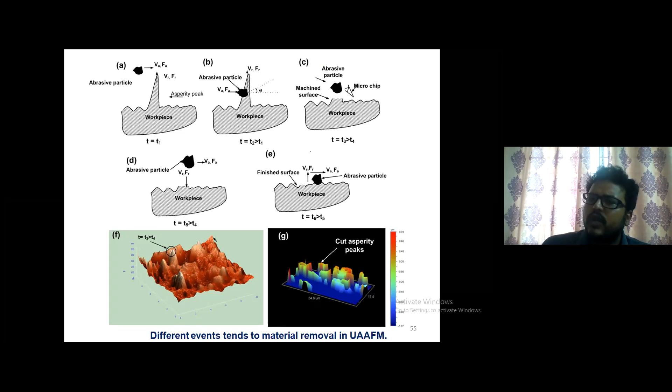So that's why, after screening a lot of factors, and after finalizing various factors of influence, various factors which are constant, and which are factors which will have interaction effect. To understand this, we should have a proper literature on the process. So that is what right now we are discussing, the literature of the process, before discussing the case study directly. I hope you followed, right? Simple AFM and the variants of AFM, how the parameters are changed and added in every case, and how the modes of vibrations also will affect the parameters.

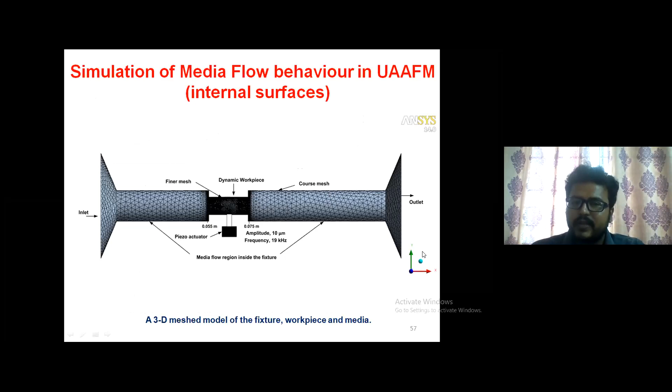So we have done a few simulation studies also before fixing the parameters. In the simulation studies, we found that the amplitude which is applied in the ultrasonic abrasive flow machine is not having any influence. So we fixed amplitude as constant 10 micrometer, and we varied frequency. We also observed from the simulation that the variation of frequency is giving better result. Before doing experimentation, we have applied the simulations.

We have done simulations using ANSYS Fluent, and we observed that by varying the frequency, there is a lot of improvement in the response. So from doing simulation also, you can screen a few factors. Like in my case, I fix the amplitude. I am not going for varying the amplitude, and I'm varying the frequency.

That is a new parameter, and also I can find out by doing this study whether there is any effect on the temperature, or what is the effect on pressure distribution, temperature distribution, velocity distribution of the medium, right? This figure shows the workpiece zone, say 0.055 to 0.075. This is the workpiece zone inside the workpiece, right?

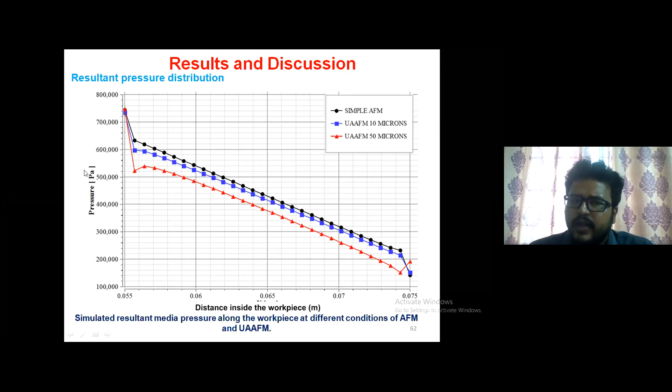So my study is when you are flowing the medium with simple AFM, what is the effect? And by UAAFM, after vibrating the workpiece externally, what is the effect? So at different microns, what is the effect, right? From this study, I observed that there is not much difference by varying the amplitude, right? And you can also see the pressure distribution inside, right?

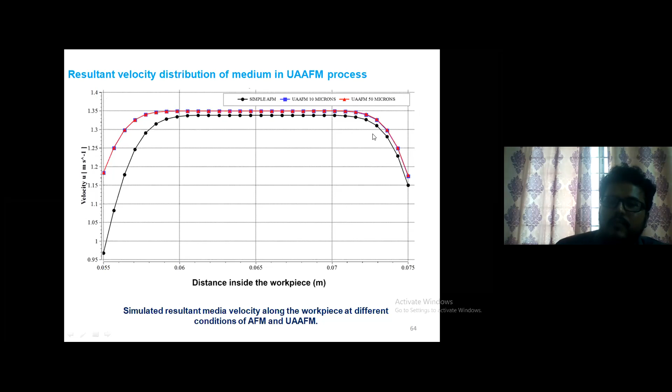And you can see the velocity contour, pressure contour, and this is the velocity distribution inside. So we are getting certain results. If you observe, the UAAFM is showing better result than the simple AFM. It may be slightly better, but experimentally you will find a lot of difference by saving a lot of machining time. This black line shows the velocity distribution of simple AFM, and the red and blue show the UAAFM velocity distribution inside the workpiece.

And also we have done experimental validation by taking SEM images, and also by seeing the forces and force directions in simulation. In simple AFM, the protrusions of the forces are straight. When you vibrate the workpiece, they are hitting at an angle theta. To correlate the simulation and experimental, we have taken a few scanning electron microscope images and tried to compare them. So I'll conclude very soon.

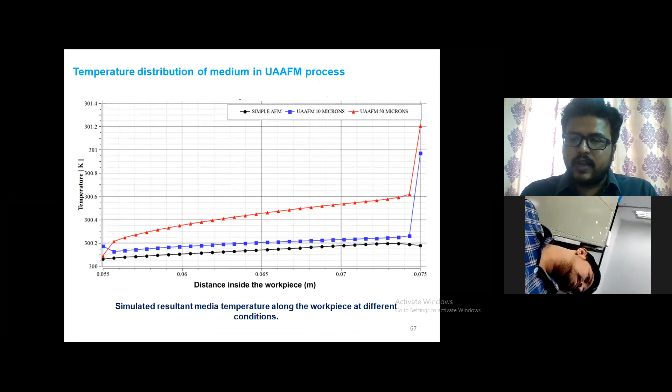The temperature distribution: after applying the frequency, the interesting study is whether we need to continue with these ultrasonic frequencies or not. Why? Because if you increase the frequency and apply the frequency, amplitude, etc., and there is any effect on the temperature, then your process performance will also be affected. That may lead to changes in your output.

So we have studied experimentally and from a simulation perspective, and we concluded that by giving ultrasonic frequency externally to the workpiece, there is no effect on the temperature of the medium, right? Why I am saying this is we are using a semi-solid medium, and if the temperature increases, the stability of the abrasive particles will decrease, so they will settle down. So we studied temperature distribution from the simulation and experimental points of view. Experimentally, TGA analysis has been done on the developed AFM medium, right?

Similarly, one interesting study I would like to show before concluding: we have worked on finishing of a bevel gear. The important part is you need to develop a tooling for the bevel gear. This is a flexible tooling for the bevel gear. The function of the tooling is to guide the medium to the target surface, as well as to hold the workpiece. Here you can see the protrusions of the abrasive particles on the asperities.

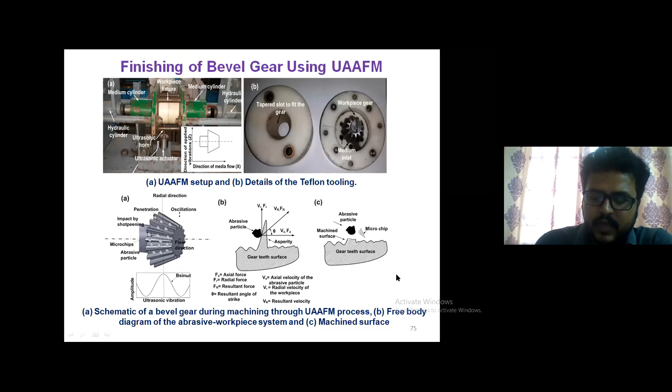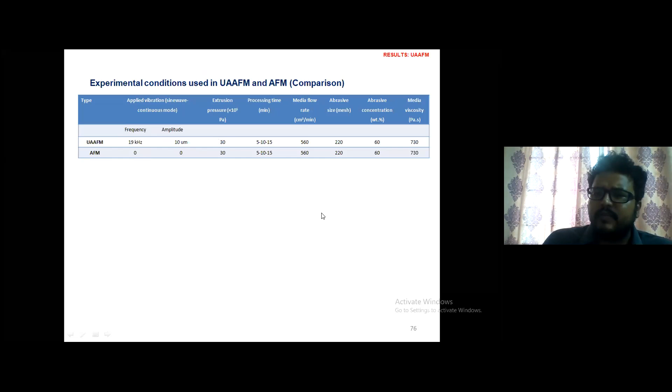One interesting study we made is with simple AFM with zero frequency, and UAAFM with 19 kilohertz frequency and amplitude 10, which are constant. The remaining parameters are similar for UAAFM and AFM. In one case we are giving the frequency, and in another case we are not. The remaining important parameters such as processing time, media flow rate, abrasive size, concentration, and media viscosity are kept constant. Our main research is to minimize the processing time, right? We achieved that by applying vibrations to the workpiece.

The matter here is how we are reaching: in 15 minutes we could finish only 50% of improvement in simple AFM, whereas in 5 minutes itself you are achieving 60 plus improvement in case of UAAFM. Means by introducing the ultrasonic frequency to the workpiece in the AFM process, the process has become more rapid.

So coming to conclusions and summarizing, I would like to show you the machine parameters, media parameters and workpiece parameters in the AFM field. We'll also have a number game and proper optimization and RSM etc. in the afternoon session. So the new hybrid parameters introduced are magnetic flux density and current in MAF and MRAF,

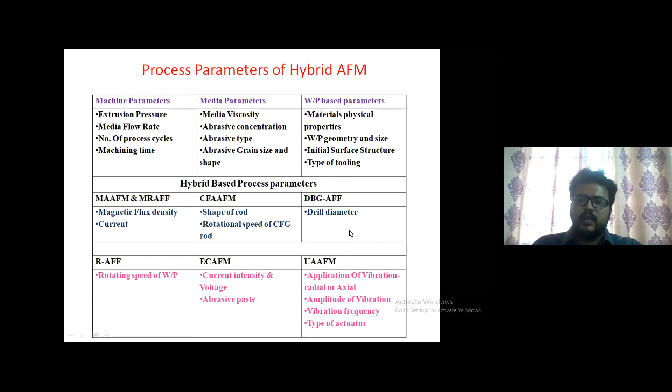And this is the broad classification. Here you can see AFM in shop floor, theoretical models, hybrid AFM applications, and the process parameters. The input parameters are related to machine, workpiece, and the medium, and these are all the hybrid parameters, and the responses are surface finish and material removal rate, right?

This broad classification gives you an idea about the hybrid parameters, variants in the domain, the theoretical models, the input variables in the domain, and also the responses which are recorded so far in the literature, right? This broad classification is giving the detail about that.

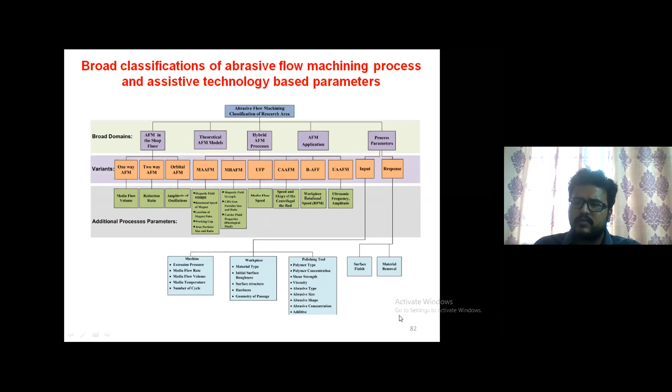So in the final summary you can see various principles like abrasives used, the workpiece used, the concentration or the levels of the parameters they have selected, what they achieved, what type of medium they have used, etc. And the capabilities: here you can see with this UAAFM process using Inconel 718 we could achieve 0.09 micrometer. When compared to other processes, this capability is better in terms of maximum material removal and surface finish.

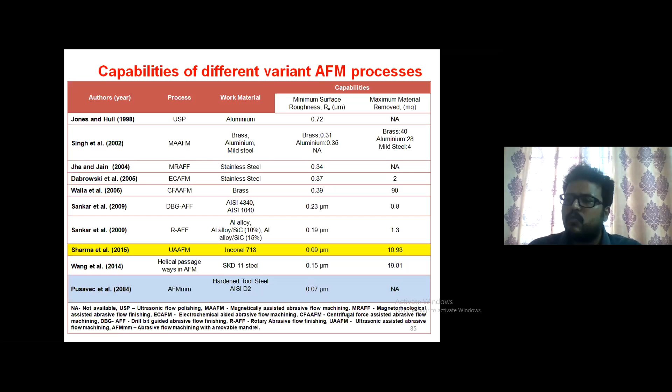That's why this process was chosen for my PhD degree, in order to improve the process by varying the direction of the vibration and also by introducing new parameters, by hybrid variants, adding two or more energies, two or more processes in order to make it hybrid.

So research potentials of this process: in the UAAFM process, many have not tried to explore the residual stresses generated after the UAFM process, how the residual stresses will act on the finished components after vibrating, and also the monitoring of the behavior. We have studied the behavior in simulation, but no one has studied the behavior of the medium in real time. That can be explored by introducing acoustic emission sensors, etc., and we can have control on the media behavior in the UAFM process.

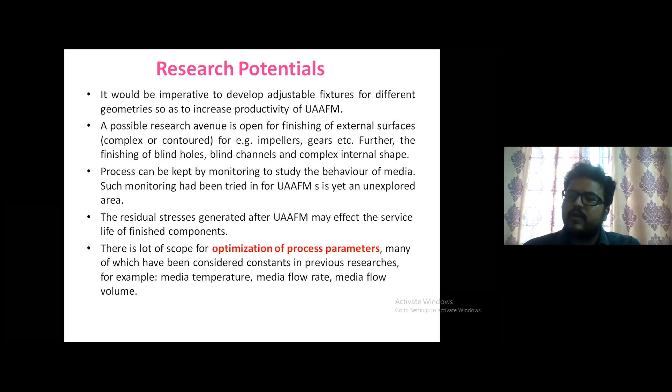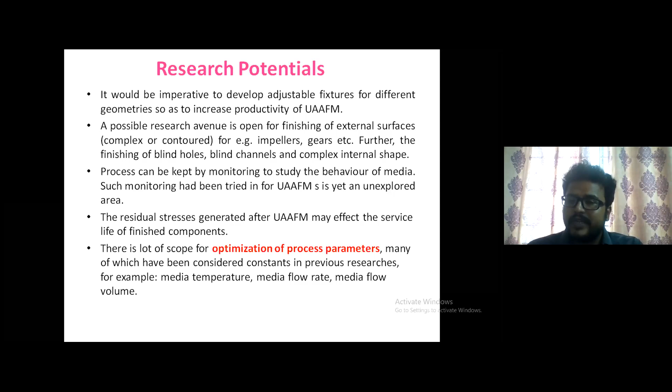Like that, one can do optimization of these parameters and set the combinations, like using a certain ultrasonic frequency, certain extrusion pressure and certain other parameters, how the response will be, what will come out of the optimization study, what the interactive plots are, and what the most influencing parameters are. Still there is a lot of scope, right?

So in the afternoon session, I will discuss the case studies on the UAAFM process and MAF process.

In that case study, you will find how we applied RSM, how we used fuzzy logic, how we used the Jaya algorithm, and how we concluded the influence of parameters and shown the interaction effect plots in the afternoon session. That case study will be discussed in detail about this process.

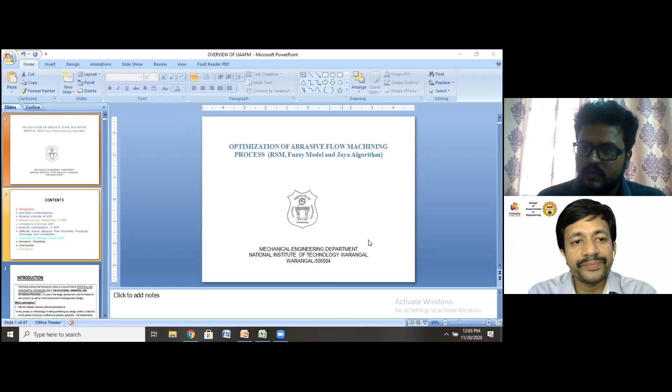When you were doing this ultrasonic and hybrid process, as you rightly said, there are so many parameters to control, and you have the option of choosing different models. So what made you select RSM, and what made you choose the face-centered central composite design? In fact we were getting these kinds of doubts in the previous lectures also, so could you clarify what motivated selecting RSM in particular, like face-centered, central composite design?

Sir, unmute, your mic is muted. Sir, Dr. Varun, sir, sir, you asked the right question. What I had planned to ask, you said. Yes sir, thank you very much for this question, thank you sir.

Actually, while doing experiments, as I explained about the process, we observed that there are a lot of factors involved, and after doing a lot of literature review and pilot experimentation, I found four parameters and three levels. Before doing the main experiment, we also did some Taguchi L9 analysis, and in that we found the major parameter giving the major contribution. We also conducted simulation, and in the simulation we varied the amplitude.